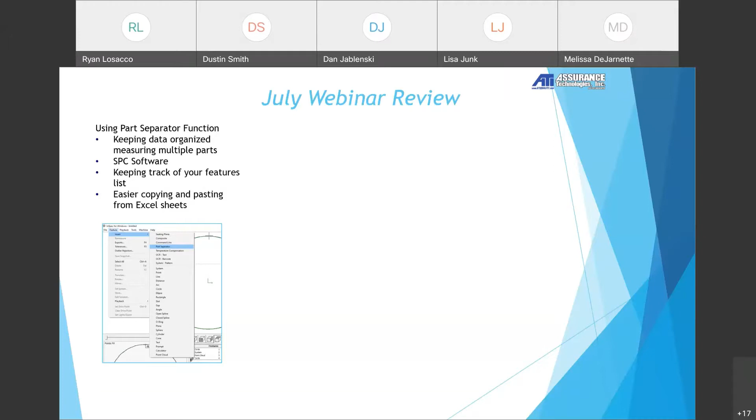We also talked about flatness, and I will be the first one to say that I am not the smartest person in the room, and I do not know everything. And I always like to say that when I start any training seminar, class, or anything like that. And I'm so thankful for you guys joining. And when I say something that actually isn't true or not the right interpretation of a standard, you guys send me an email and say, hey, this is actually how I interpret it. So I know that gentleman is on today, so I want to say thank you in front of everybody.

So when I was talking about flatness, when we have this symbol, you guys can see my cursor here, it had this square next to the flatness, so we have two flatness readings. I was taught a long time ago in a blueprint class that that was meaning one thing when it actually meant something else. So it actually means the size of the controlled increment, not the number of increments. So I thought you took that surface divided by 10, put 10 planes on there. It is actually the size of each plane going on there. And I hope I am explaining that correctly.

So if you guys joined last month, wipe that out of your memory, and I can send you this part of the standard so you guys can read up on it as well. But I just wanted to say that in front of everybody that I'm not always correct, so do fact check me sometimes. And if I interpret a blueprint wrong or a standard wrong, I would love to learn from you guys. And this gentleman said that he's been teaching metrology and blueprints for over 40 years, and he learns something new every time. And that's why I love teaching, is because I learn something new every time. So thank you for correcting my last webinar there.

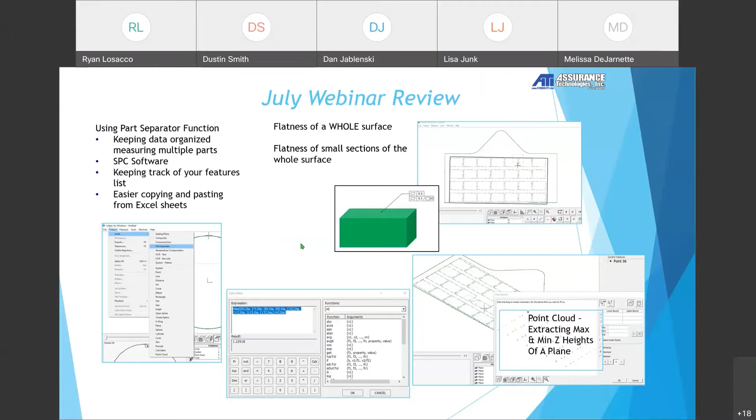And we started talking about the calculator function and all the different things that are in the calculator function, and we'll hit that a little bit today. But we talked about finding, if we have 10 diameters, finding the max, min, and average of all 10 diameters using the calculator function. Calculator function is super powerful. And there's times that you're trying to figure out how to calculate something that InSpec maybe doesn't have the option for in its normal presets. You can always look to the calculator function. And I would actually love to hear from you guys in your feedback surveys, or send me an email of ways that you're using the calculator function, so I can use that for a future webinar to teach everybody else.

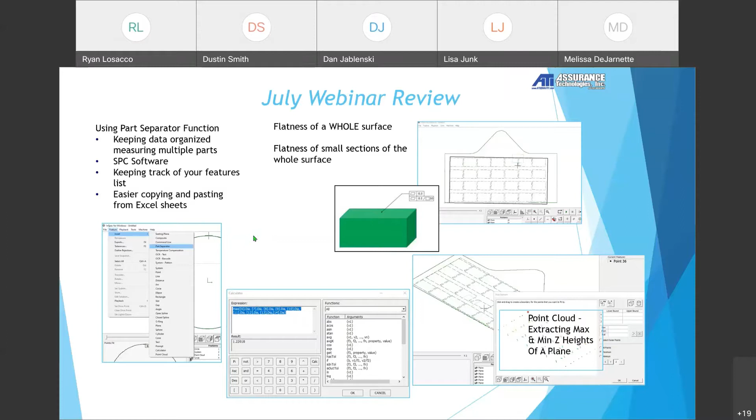So first thing I want to talk today about is the rectangle tool. Kind of funny when Dan and I and other trainers go through features, we'll bring up the rectangle tool or we'll bring up the ellipse tool, and we get a lot of either blank stares or people just tell us we never measure rectangles. But it's funny that I've had 2 projects in a row that are using true positions of the rectangle tool. So I figured, hey, why not spend a little time talking about the rectangle tool.

So when I measure a rectangle, when I measure a slot, when I measure distances, gaps, angles, anything, I measure the features first. You are able to come and just click rectangle and go measure your 4 edges of the rectangle, but then those lines are tied to the rectangle and you can't use them for other distances. If you measure 2 lines as a distance, you are not able to use those lines for anything else except the distance. Same thing with angles and even slots. When I measure a slot, I'll do the 2 arcs and I'll do the 2 lines, and then I'll click slot and I will click all those features to create that feature.

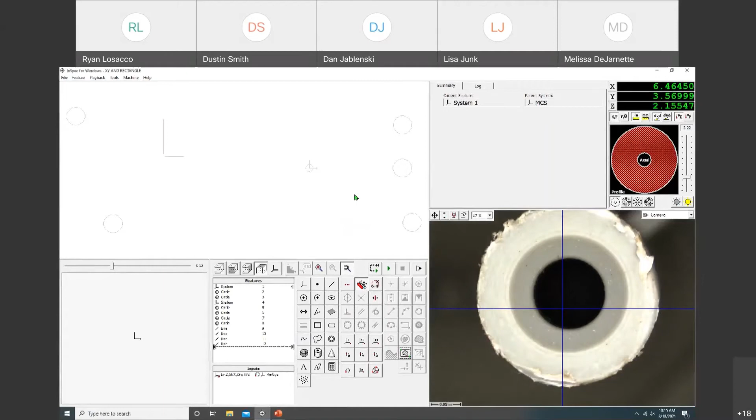So I did a little prep work this morning, doing a couple programs. So it's kind of hard to see here because I disabled all the features, but I just wanted to be able to find my way around this part quickly. So we'll measure it live. I'm going to go ahead and turn on my surface light. And we got this plastic part here, a couple different posts going on. So with the rectangle tool, I'm going to come over here. We got this feature that the blueprint is calling out the true position of the center of this rectangle that we have going on here.

So the very first thing that I am going to do is I'm going to set up my datum structure, which on my blueprint, it says that this post right here, the center of this post, is my origin of X and Y. So I'm going to go ahead and click circle. Let me go ahead and delete that. I'll run the program. There we go. So I'll click circle. It's disabled.

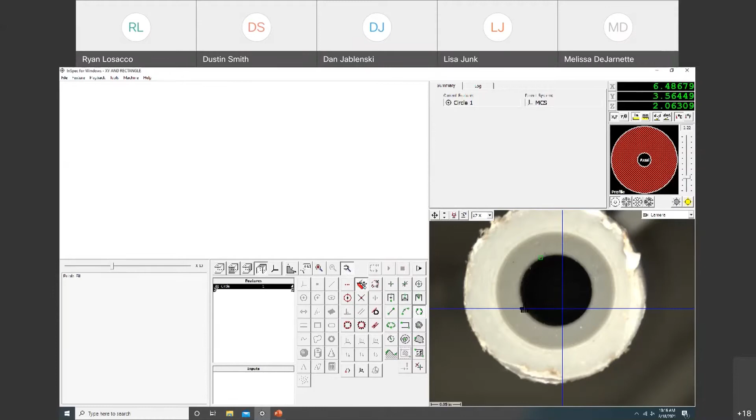I'm going to go ahead and delete all that. There we go. My vision tools were disabled for some reason. I think it was trying to have me run some part of the program. Anyways, so I'm going to measure this with an F-scan circle. As I've talked about in previous webinars, I'm going to have the red arrows going from the dark to light because there's less gray value going on, and then it's able to scan that circle there.

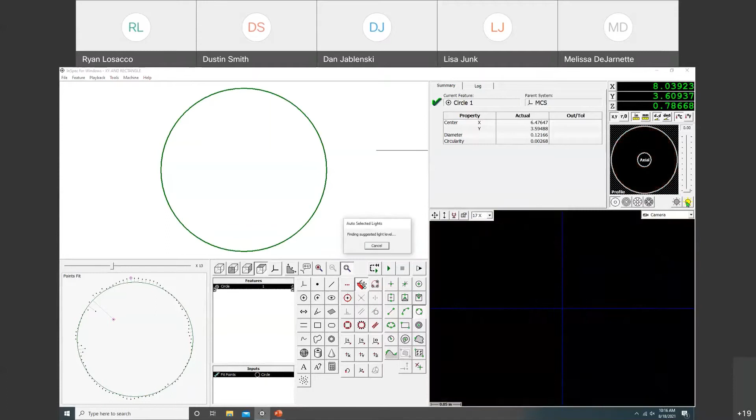And then now I'm going to come over, I got to find my datum B, which is right here. There's this circle that we're going to use to skew to. I'm going to go ahead and turn on profile light since it's a through hole. And while I see this fixturing, so this diameter right here is actually one of the threaded holes on my fixturing plate. Few people have requested more topics on fixturing.

One little tip and trick with fixturing here is that if you want to avoid having any of the acrylic scratches or glass scratches or dealing with the threaded holes in your plate, maybe lift the part up a little bit so this gets blurry. That'd be a smart thing to do if you're trying to write a fully automated program that's not going to scan any wrong lines. So here I'm going to use just best edge points real quick to measure this diameter.

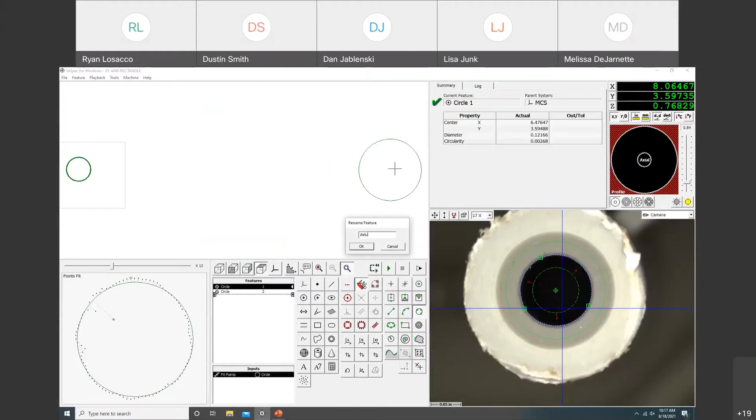So I'm going to call this datum A, which datum A is usually a plane, but we'll call that datum A. We're going to call this datum B. So now I'm going to come down. I'm going to set my origin of X, Y, and Z. I should get a focus point for the system, but for time's sake, I say that a lot. I'm just going to set my origin of X, Y, and Z to that. And then I'm going to skew to those two circles.

When I skew to those two circles, it's doing a line straight through the center of both circles. If you are more of a visual person and you want to skew to that actual line, you could click line and you could click your two circles here and you could skew to that line. But I like clicking less and getting results faster. So I'm just going to skew to those two circles there. So now I got my origin over here to this diameter, and I'm skewing between these two diameters.

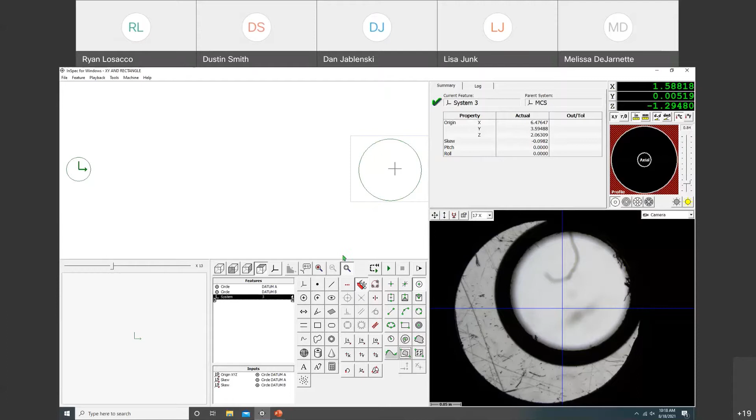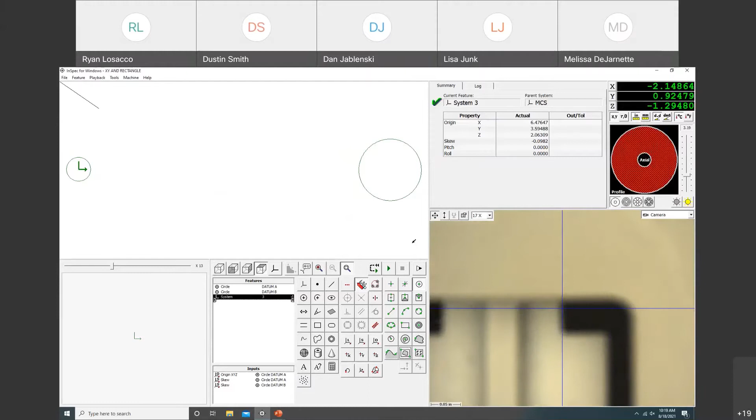So now let's go to that rectangle tool. Here's a little trick I like to do: I like to turn on my axial light because on the part, it's a smaller circle of light, so it's easier to find where you actually are on your camera. So it's a little way to move around the part without knowing where the feature's at. So on these edges over here, I'm going to come measure this line. I'm going to bring the Z up actually to get it in focus.

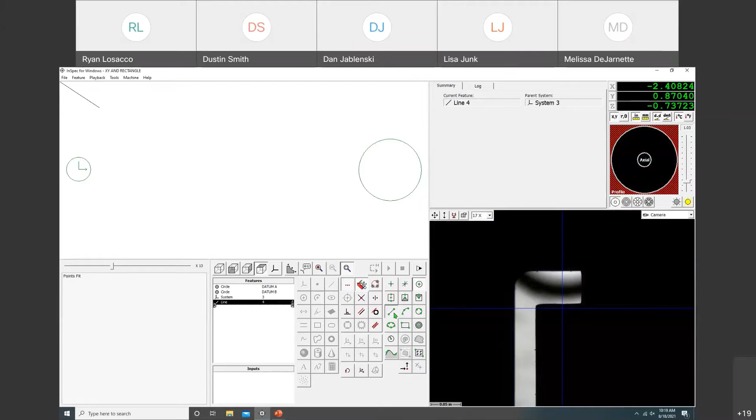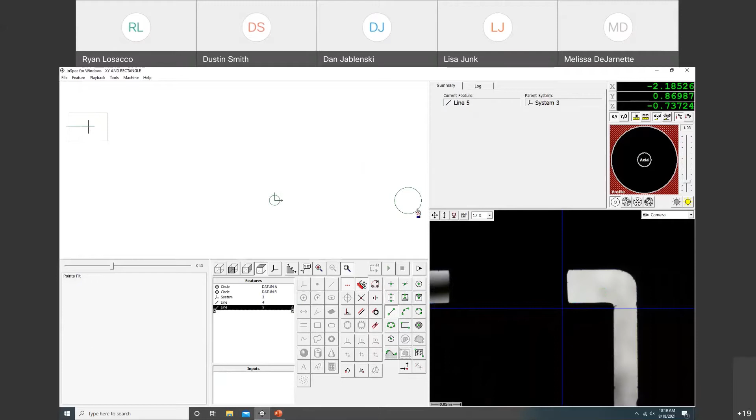And I'm going to select line. I'm going to do more inputs so I can get both edges of the line. I'm going to use my F-scan line tool. Measure one edge here. I'm going to flip that arrow because there's a lot of noise, gray value going on over there. And then since I have more inputs selected, now I got my line going on over here in the top left corner of my schematic window. I'm going to click a new line, come down this edge. Get as long of a line on that edge as possible.

I'm going to switch over to surface light so I could see the end of this part here. I'm going to do line again, more inputs. I'm going to get the best. So you can see here in my points view, and I'll open up a large view here. We can see that our points, they're kind of scanning on that line. We got that best fit line going through the center. It looks pretty good. If I had this opened up a little bit, you can see how much more dramatic the edges get, or the points landing.

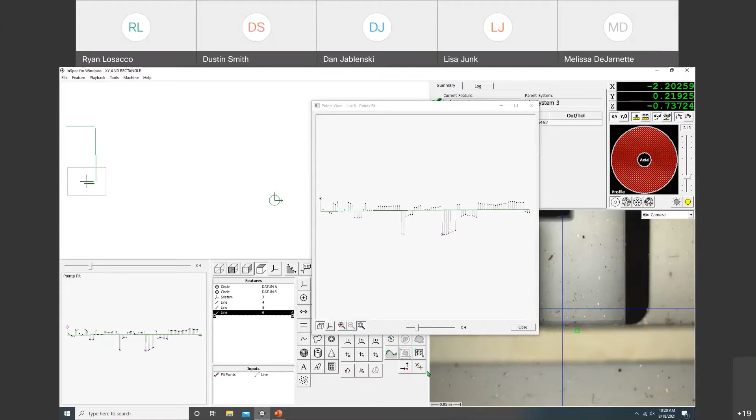And you can see down here in my camera window, those green dots are where the points are actually scanning on there. So I actually want to flip that edge, get these windows out of the way, flip that edge and get a nice line on that surface there. And normally, if I was programming this for production, I would spend a lot more time on my lighting to figure out the best lighting.

While we're here, let's go ahead and switch some surface lights and octants to see if we get any better lighting going on. Switch to axial light. That's a lot worse. Let's switch to front.

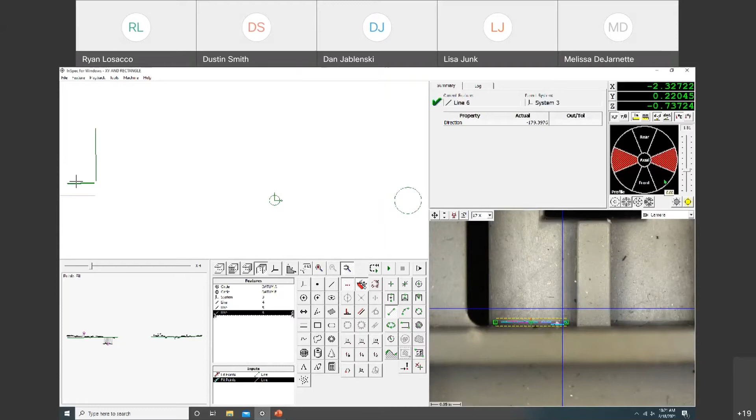Now we're casting a shadow over that wall. I don't like that at all. I'm actually going to click on the left side octant, hold down Control, select the right side octant. So those are the ones only with polka dots. Doing from side to side, we actually get a little bit more shadow cast in that groove that's going on. I'm going to bring that over to avoid whatever that is going on there.

All right, so I'm going to switch back to profile light, do a new line, more inputs. And then now we have our four edges of our rectangle. So now I can come down here and select the rectangle tool.

I see a lot of first-time users, since they both kind of look like a plane, get the rectangle tool and the plane tool confused, but always remember you could hover over an icon and it'll show what that tool is. And also in our basic training manual, there's a page for every single icon down there that you guys can have at your desk in case you forget.

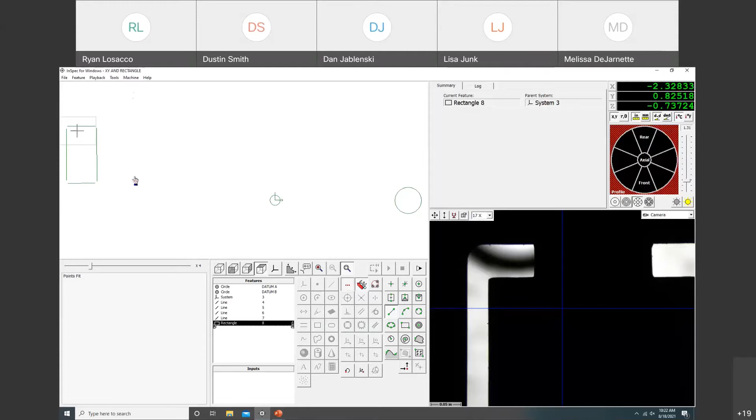So I'm going to now select all my four edges of my rectangle, and it creates my rectangle there. What I use this for is if it's asking for a true position of this rectangle, I can click point, and now I can click my rectangle in my features list, or you can come over to the schematic window, and it creates a center point. So now I have my XY coordinates that I'd be able to get my true position from.

And things that we can tolerance with a rectangle: we can tolerance the center X and Y, we can tolerance the width and height of it, and we can tolerance the true position of it. So if we did 2.30 and then 0.54, it calculates our deviation from nominal. Let's just put it out of tolerance just to show you. Close, and then we have our true position out of tolerance there.

So another thing that you could do, if you don't want to use the rectangle tool, we could do a line. We can use the bisect construction tool: if I click both long edges of the rectangle, we get our center line. And then if I click line and I click the short edges of our rectangle, we get our other bisect line. And then we can do point intersection of those two bisects. So a little more work than just clicking the rectangle tool, but in case you need these center lines for anything as well, they're there for you to work with.

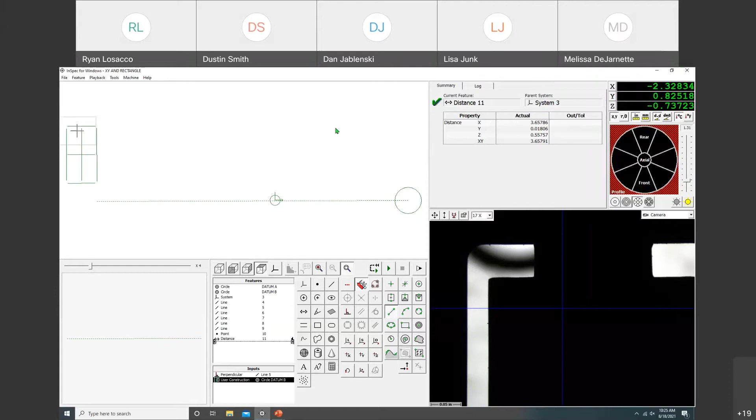That's the rectangle tool. If you guys have tabs or other rectangle features on your parts, where I've been seeing it in the projects coming into our lab here in Bartlett has been the tabs of off-roading vehicles and plastic parts that are being clipped on to the frame or other plastic parts. They need true positions of those rectangles, like in this blueprint here, it was asking for the distances from those.

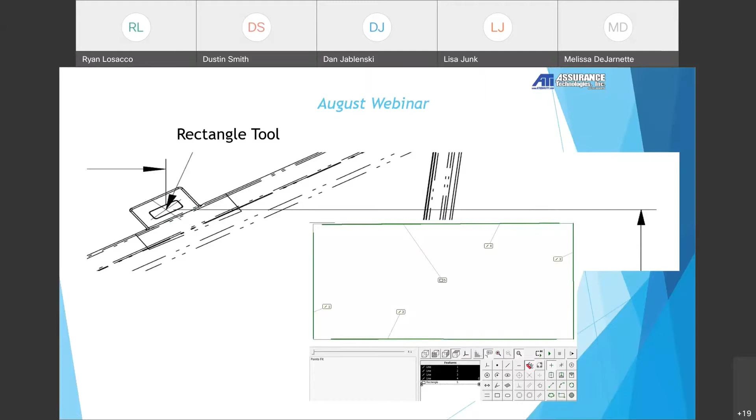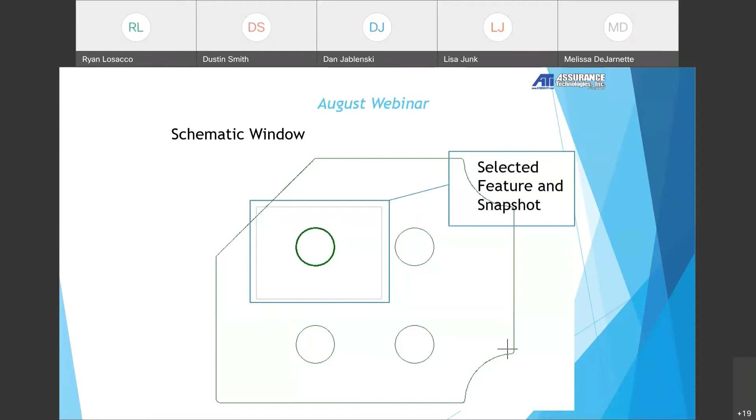Here's a little thing that I wanted to talk about: the schematic window and the different things that are in the schematic window. So if you are on your schematic window, and we'll go live here on InSpec in a second, but I want to show you this gray box is your camera window. And this can get confusing: if you're at the end of your program and you're clicking around in your features list, it's showing you snapshots and where that snapshot is. But this crosshair down here is the actual machine location.

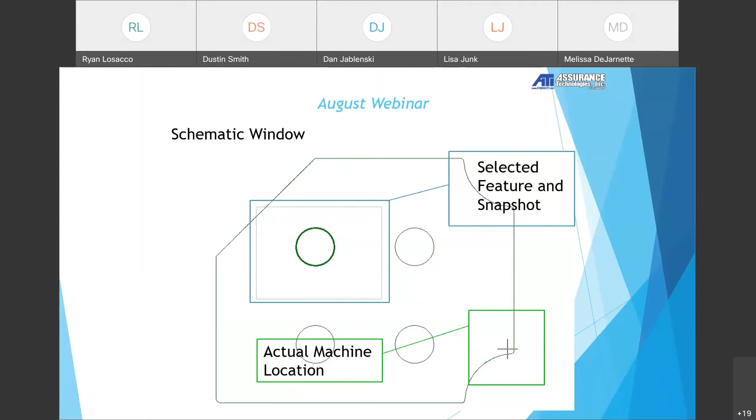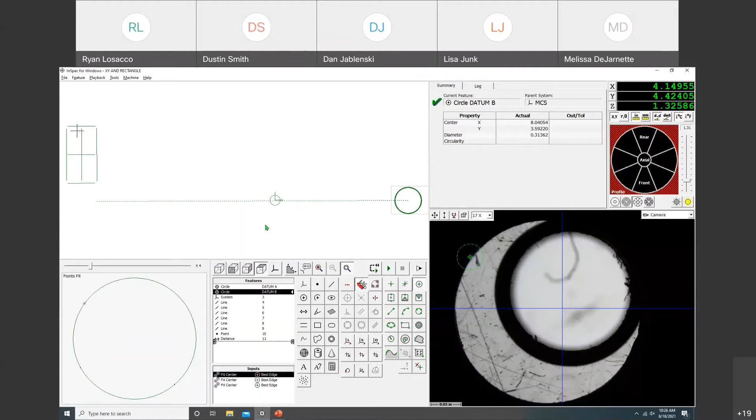So sometimes if you're moving the part around, if I go ahead and click on this circle that's datum B, you can see that my gray rectangle over here is the camera window, but that's showing what's in the camera window. My actual live location of the machine is over here on the rectangle. So this could get confusing sometimes, that if I know I want to go to datum A over here, and I'm here on this circle and I start moving to the left, I'm actually way over to the left of the part, and I have to come over.

And now when I'm moving the camera live, the crosshair and the gray box are in the same location. So I've seen a couple people get mixed up with this when they're programming or in training, so I just wanted to mention it real quick. If this kind of annoys you or you're trying to show somebody something, it's just a little tip there.

All right, calculator functions. When we are measuring circles, most of the time when you're reporting true positions, you might either give a positive X and Y or absolute X and Y on your report, or you might report the negative direction. So wherever this comes up, if it's true position and you're reporting, or if it's going into an SPC software, and when we measure a diameter, if you want to report an absolute number, but Micro-Vu is reporting it as a negative number because of the location of it in relation to your datum, we'll be able to pull that absolute number out of there.

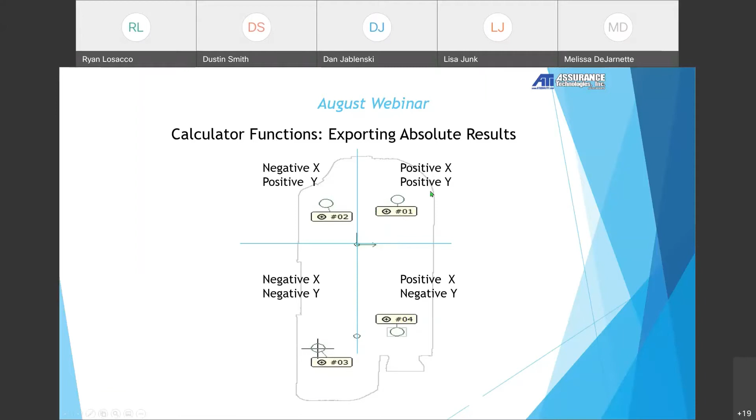So here we can see that our datum is in the center of the part, same part that we're using live, and our diameter number 1 is in the positive X and Y coordinate of the part. To the left of that is number 2, where it goes negative X and positive Y. Down in the lower left-hand corner, you have negative X and negative Y. And then lastly, number 4, you have positive X and negative Y. So it's kind of nice because it's alphabetical order in the calculator functions.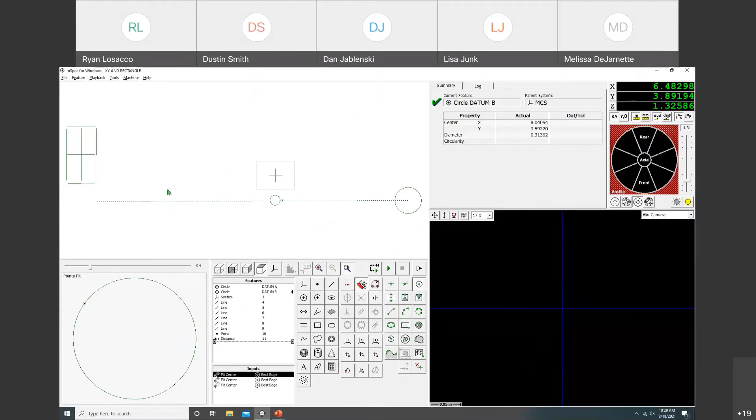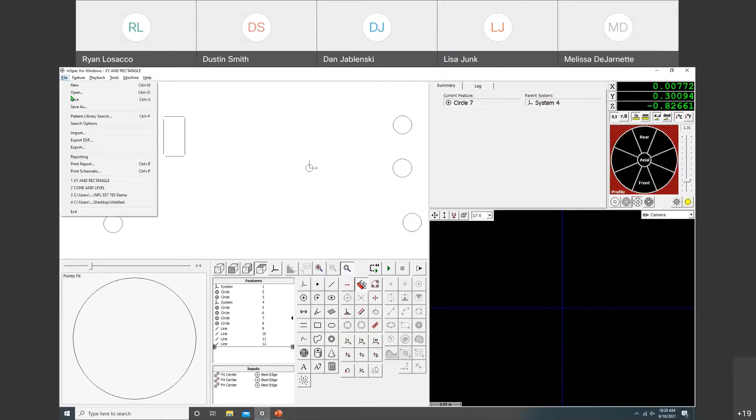So let's see if I go back to this guy. I'm going to enable this whole program so we can measure it. In case you didn't see this in the previous webinars, you can highlight features, right click, and go to this playback option, and you can disable or enable it. I think I showed last month or the month before using a spline to outline the whole part and then disabling the spline just so I had some reference of where my part is on the stage and other features. I'm going to go ahead and enable all this. File, save. Let's go ahead and run this program.

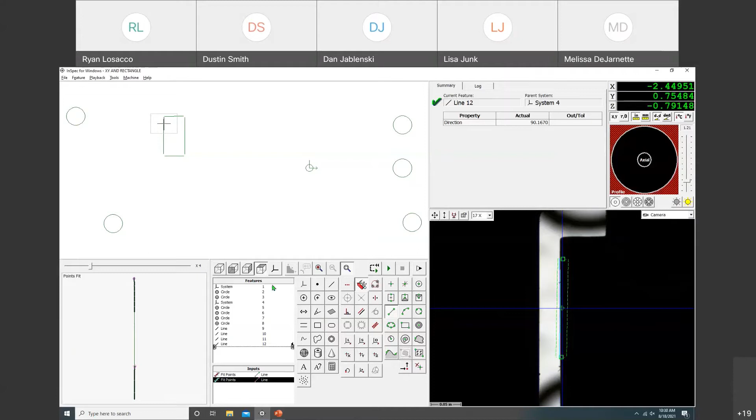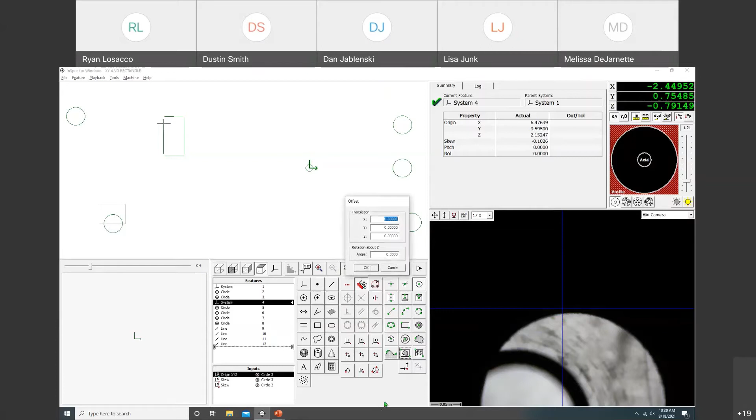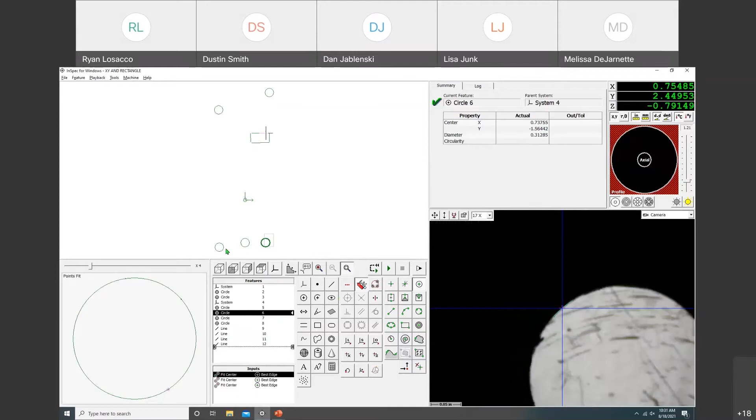We could come down to the red construction icons, and we see this offset here. We can open up offset and we can rotate about Z. In this case, I want to rotate around Z 90. And now you can see that my origin turned 90 degrees. So now when I hit the PCS view right here, my diameter is positive, positive in the upper right corner. Now I have my negative X, positive Y on this diameter, and so forth. So I have these two locations.

I want to come over here to circle 6. I can click the calculator function. I can double click absolute. I will select the circle that I want to get an absolute instead of a negative number. And it comes up with anything that a diameter is measuring, everything from XY location to profile to position, concentricity, circularity.

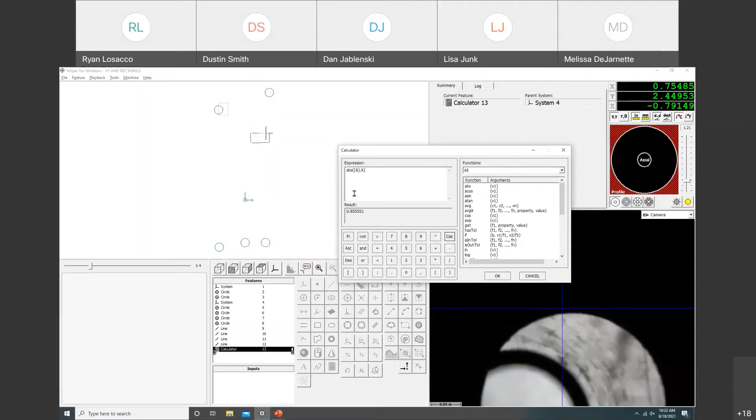So I'm going to click X. I'm going to say I want my actual, not the deviation, but if there's anything that you're looking for to pull out of a feature, we could ask for the out of tolerance amount, the lower, upper, deviation from nominal, and so on. So I'm going to click actual, calculate, and now I got my positive result that you can right click, tolerance, or export, whatever it is.

Basic dimensions, so I'll leave that, and then I'll export it. And now I'm exporting an absolute number instead of exporting that negative number. So this is useful for, other than true position or anything else, any reporting, any software you're bringing into, so you don't have to be rotating your system to get all these positive in any certain way.

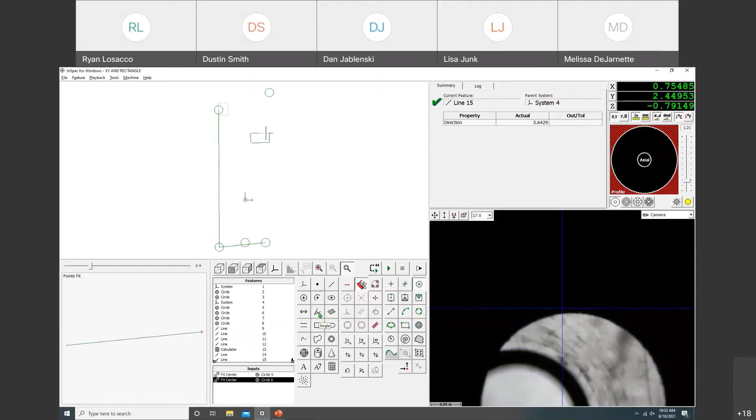You can do that. Another thing with negative and positive numbers that I find very useful: I'm going to create two lines off of this guy and this guy. I'll do another line here and here so I can get an angle. So I'm going to use the angle tool, select my two lines, and now it comes up with these different angle options that we have.

Down here, depending where your angle is in relation to your system or your part, your skew, you can select positive or negative numbers. Where I use this the most is that an angle is just an absolute number when you're putting it on your inspection sheet 90% of the time. But depending where the angle is on your part in relation to your system, you could get a negative number.

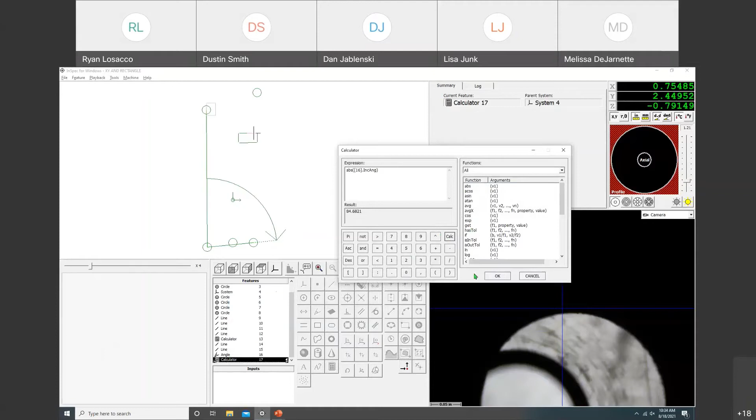So when I copy and paste it off of my Excel sheet, I always have to go into my Excel sheet and say, make all these cells absolute, when in my programming, if this was negative, I can just use the calculator function, absolute, click my angle. I want my actual, and then we got our absolute angle number there. And then you can go tolerance it, export it.

Now with SPC software, I'm not completely sure, I'm a little unfamiliar with it, how it'll pull in the calculator function if you're labeling it angle. That's something we can help you with if it kind of messes stuff up going into your SPC software. If it's ProLink, we can help get them involved to help you out with whatever works the best for your situation.

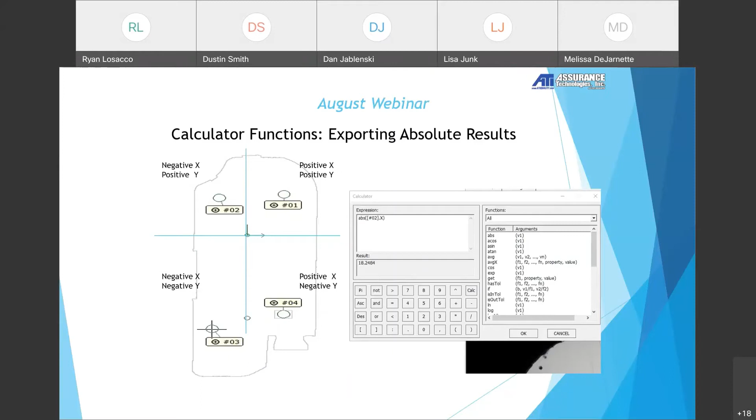I say this a million times, but these webinars are to show you the tools in your toolbox. If you never have to use the 10 millimeter for a year, but then all of a sudden you need to use the 10 millimeter socket, you know where it's at and how to use it. But here's an example of the angle that I was talking about.

Awesome. So the next thing that I want to talk about is offsetting features and construction features. So in this instance here, we have a blueprint that's actually wondering, on this cone that we have going on here on my sample part, at a certain height, what is the diameter on that cone? So it was halfway down the cone and it wants to know what's the diameter at that height. Using construction icons and the offset features, we're able to do an intersection of a plane and that cone to be able to get our diameter at that intersection.

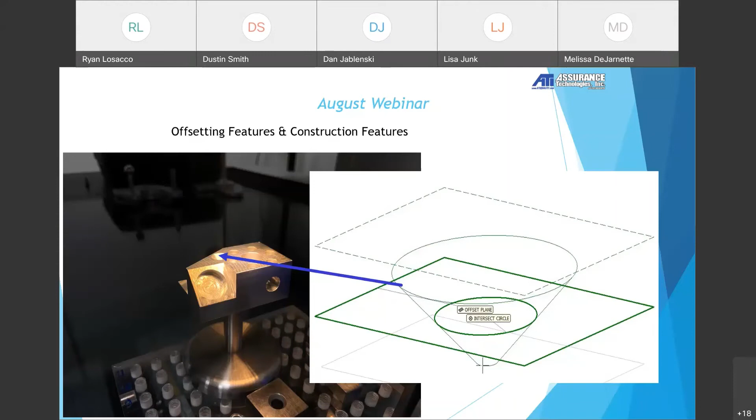I'll come over to inspect here. Let's go file new.

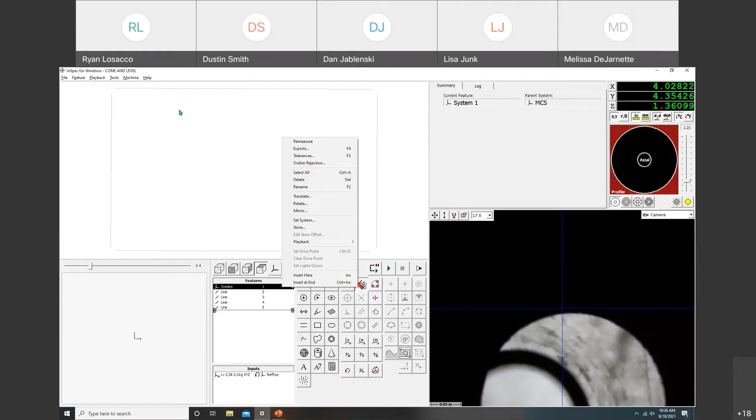Put that little machine block on the stage here. Again, I went and measured the outside edges of the block so I would be able to find it easily. Here on the webinar, you guys can do that to give yourself the outside features to work yourself around on the part, because now I can, in my schematic window, click move here where I want to go.

So first thing we're going to talk about, I know that my cone is somewhere in this area here. And boom, there it is. Because I had my disabled lines, I'm able to click around in my schematic window a lot faster. I'm going to go ahead and get this surface in focus.

I have not had luck with focus points in the past. I think it's because WebEx messes with the video card. So let's see if this works. Hey, look, it's working today. We're going to run with it while we can.

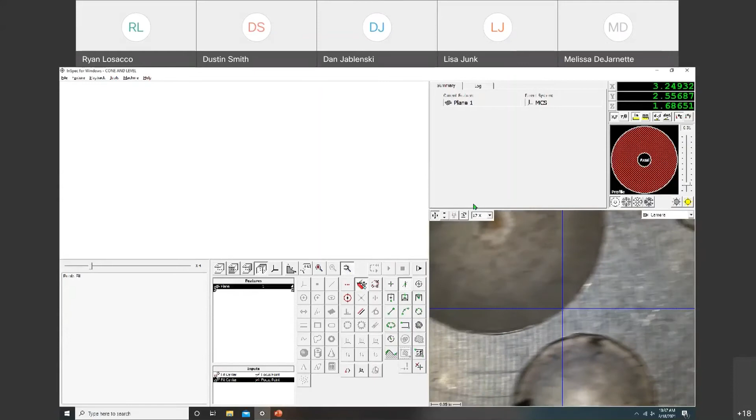So I'm going to go ahead and do a plane on the top surface of my cone and keep it local. Even if the top surface of this part is datum A and you want to take 1,000,000 points around datum A, for this case, I would still do that, but then go make another plane that we can offset down, because we don't want to offset datum A and mess up the rest of our system.

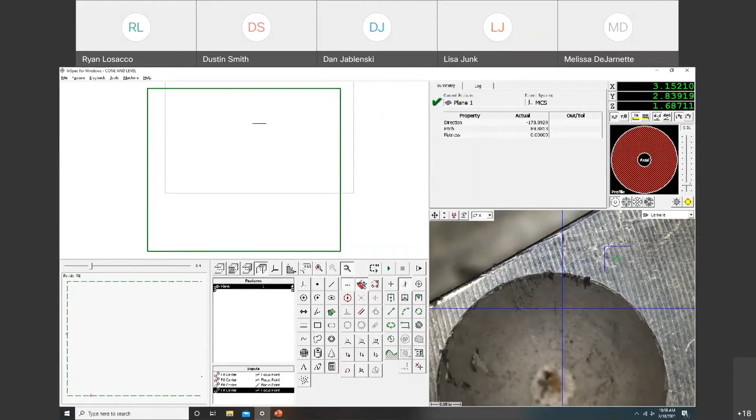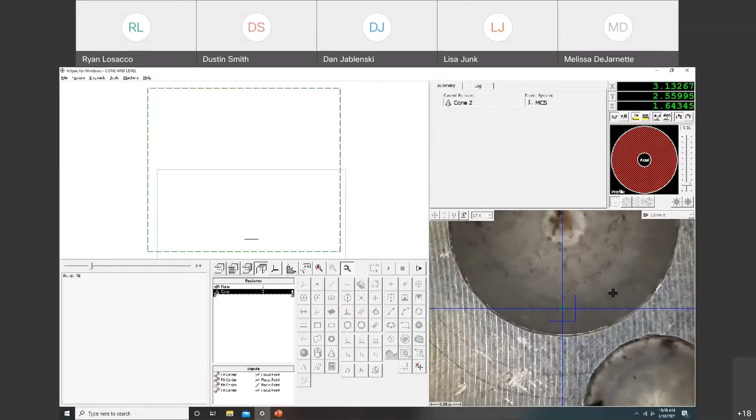So now I'm going to go ahead and measure my cone. And yes, I should be at a higher magnification for accuracy in Z. But in this case, I want you guys to see the whole feature while I'm going around. So now I'm going to click cone. I'm going to click more inputs. And I'm just going to start taking focus points around this cone. And it's able to use that focus point and Z measurements to know the different levels of this cone. I'm probably going to do more points than I need.

I apologize about background noise. You guys can hear that. Shipping is extremely busy here at ATI.

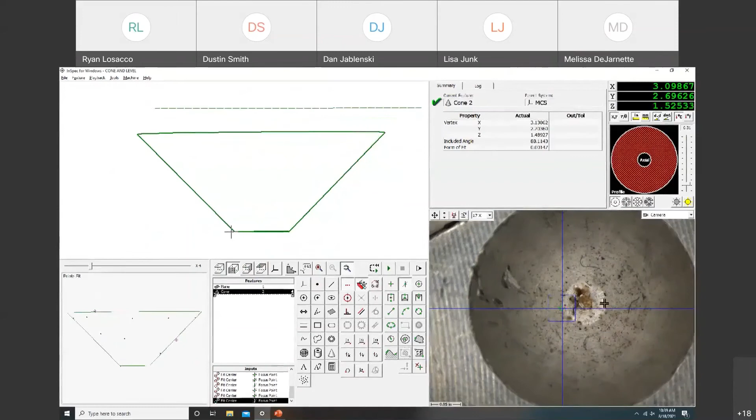So here I'm going to hit the isometric view. You can start seeing my cone. I'm actually going to hit the front view because I want to make sure that the top of my cone is almost as parallel as possible to the plane to make sure that I'm getting a real good reading and my focus points are creating that 3D cone the best it can.

And if you hold down the scroll wheel on your mouse, you're able to move it around kind of like CAD software, if you've ever used that before. So now, make sure that I'm in inches. Yep.

Now I'm going to click plane. I'm going to copy plane 1. So you can either click it in the schematic window or you can click it in your features list. So now I'm keeping my original plane so that doesn't get changed. And then I'm going to copy the plane and I'm going to offset that copied plane. So I'm going to come down to my construction icons down here, find the offset icon.

And I'm going to say I want to offset that negative, let's try 0.1. I don't have my blueprint on me, so if my memory serves me correct. So I just offset that plane down 0.1 of an inch to get it to the location that we want to get that diameter there.

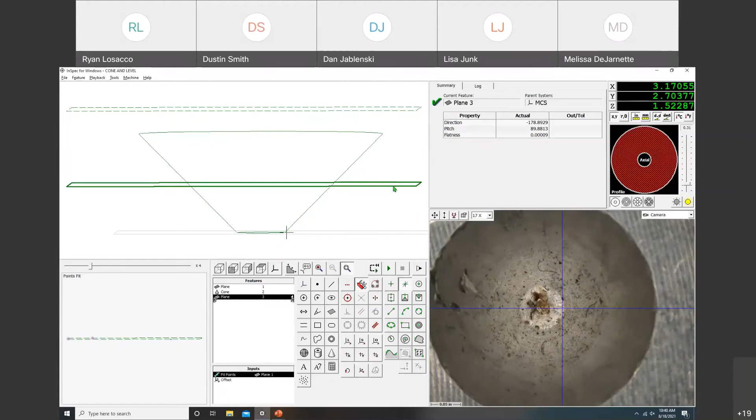So I'll run through that one more time. So I'm going to click plane. I'm going to click plane 1, so it copies plane 1. I'm going to come down to offset. And I want to bring that plane down negative 0.1. And your blueprint will tell you what height it wants the diameter at and all that.

So here we go, isometric view. We can see our two planes, our cone. So now I can click circle because we want this diameter that is intersecting this cone and this plane here. So I'm going to click circle. Now I'm going to use the intersect tool. You can use the intersect tool for intersection of two lines, intersection of a line and a circle. In this case, we're going to intersect the plane and the cone here.

So now I click the intersect construction icon. I'm going to click my plane and I'm going to click my cone, and it gives us that diameter at that height that we needed in the cone there.

Other ways you could do this: if you had a touch probe, you'd be able to set your origin of Z to the top plane, and then you would be able to bring your touch probe down negative, whatever it needs to, and take that plane there. But if you don't have a touch probe, this is one way that you can get that diameter at a certain height.

Try this out on other features, knowing that you can offset planes, offset circles, offset lines, anything that's maybe on your blueprint that you can't physically measure, because when we're looking at this cone here in the camera window, even if I said my origin of Z was this top plane, and then I wanted to do a focus point at a certain height, I can right click in the camera window and say move to absolute

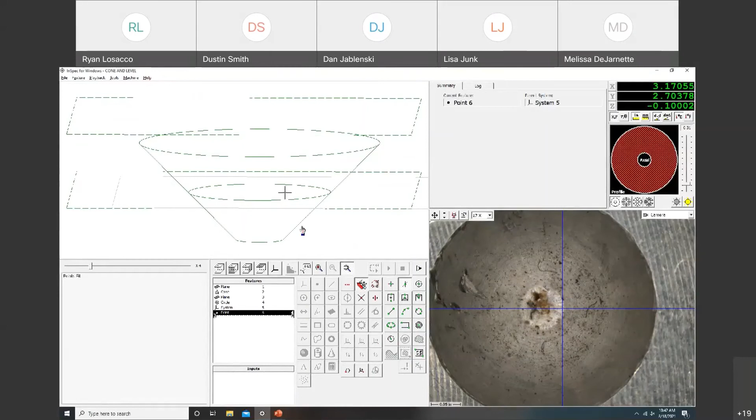-0.1, and it brings my camera up to that height, but still looking at this cone, I don't necessarily know where to place my focus points there. But if you're physically touching it with a touch probe, that would work.

So other things with construction features is leveling. I want to show you when to level and why it's important to level. You can see here we have this angled surface. When I take this diameter without leveling, it makes the plane, I never know how to say this, parallel with the camera or perpendicular to the camera, but basically it's flat. InSpec is always thinking more in 2D. The software is thinking 2D, even though we can do 3D measurements.

So if we took a diameter at different Z heights, like we will on this diameter over here, it'll either average the Z heights or it'll place it where we have our origin of Z, something going on there. So we can see that this diameter that's not on the plane, this dashed line here, that's not leveled.

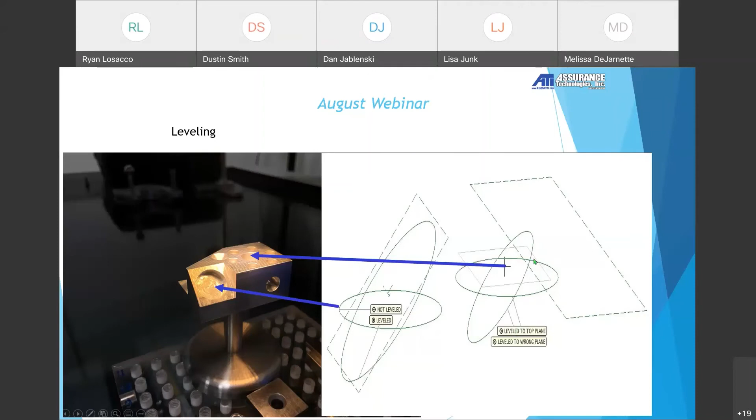But when I leveled the plane and took the diameter, it took the Z measurements into account. So if I was measuring this part, most of my features are on the top surface. So I'll put it on a fixture in some sort of way that those are... this plane, so that's looking at the camera when we can level. And also, you can see over here, I'm going to show you an example to keep track of your levels, because the one that is angled, I was still in my system that had it leveled to the left plane, not the top plane here. So it was actually placing those points leveled with that plane.

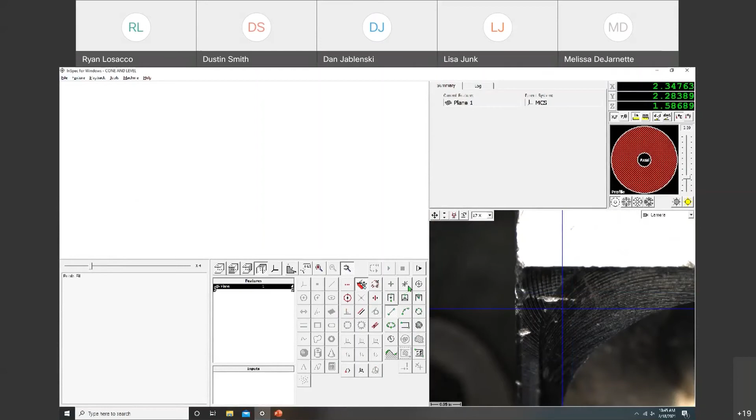Let's go ahead and do that live here. Hopefully my focus points continue to work here for you guys. So I know that my plane is somewhere over here in the lower left-hand corner. Move my surface lights up a little bit. So the first thing that I'm going to do is I'm going to measure a plane, use focus points.

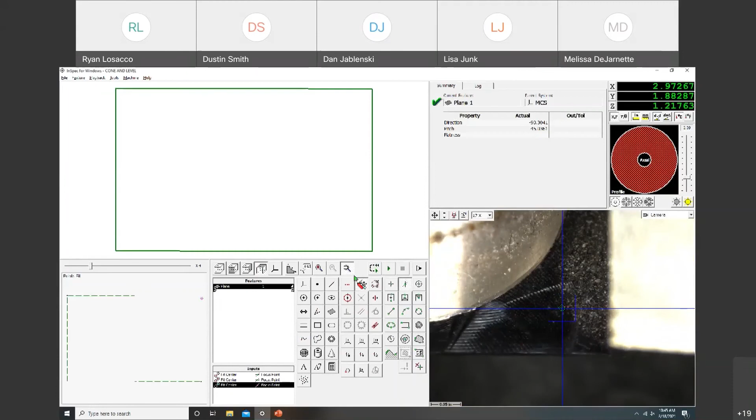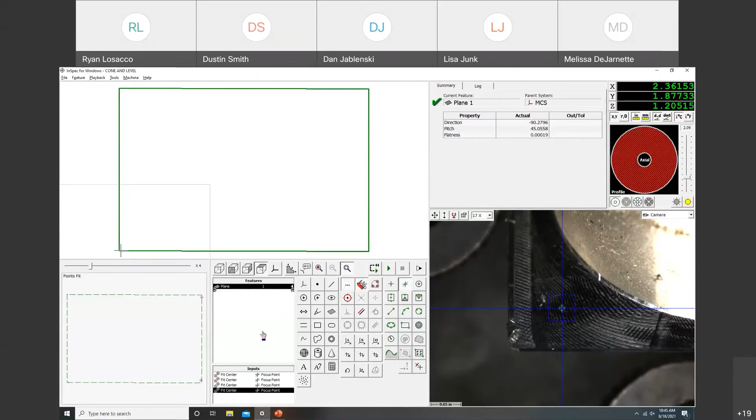And these kind of topics of leveling, setting origins, and skews, if you've been through our formal training or if we've come and done on-site application training, we talk about the importance of setting systems and what to set systems to. Dan's going to be teaching the datums and systems session at our training seminar in October. We're going to talk a lot about complicated systems and how to make your systems the most solid they can be to get all your different measurements. And I'm sure if you've been programming for a long time, you've had probably 5 to 10 systems in one program, especially if you've seen a blueprint that has double letter datums. You need to do a lot of that.

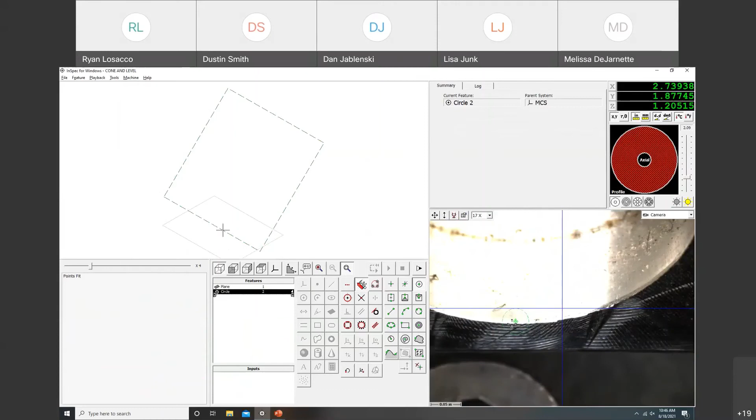So now if we look at our isometric view, we can see that we got our angled plane right here. So if I don't level, if I don't set an origin or anything, and I come over and I take this diameter, I'm going to place a point there. I'm going to bring my Z up to get this edge in focus. I'm going to take a point there, bring my Z up, take a point there if it'll read it. And since I didn't level, you can see that it is going parallel with the camera. And that's not the diameter we want.

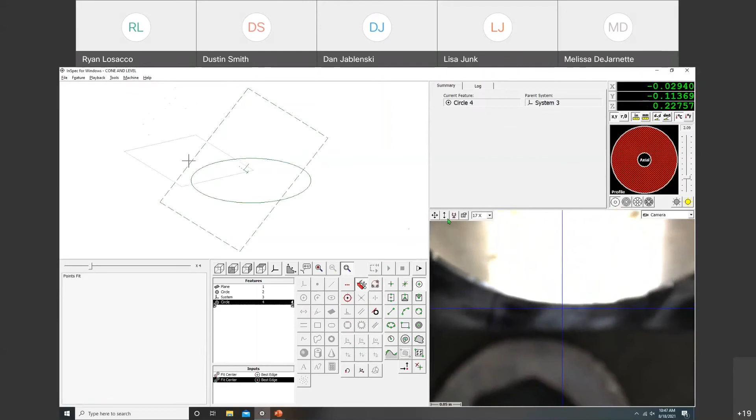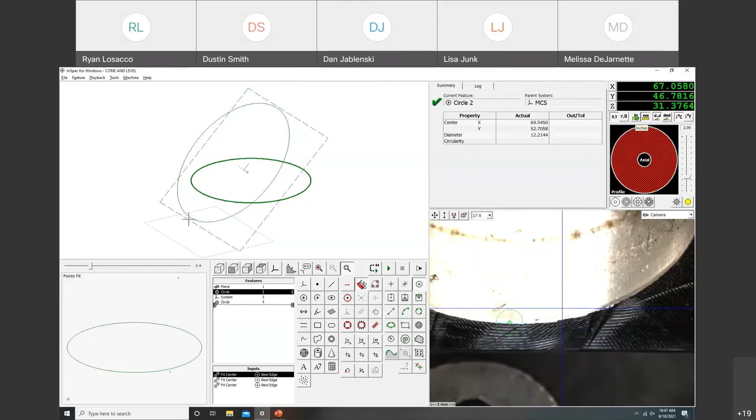So if I set my level to this plane, just so the schematic window looks good, I'm going to set my origin X, Y, and Z there. Now when we come take the diameter, you can even see that the scanning tools are leveled with my system. Now we have the circle on the surface that we actually want. And if we look at the difference between the two diameters, one not leveled is 0.48, 12 millimeters for those that are in metric. And then our level diameter is 0.567. Huge difference. And that is either way in tolerance or way out of tolerance.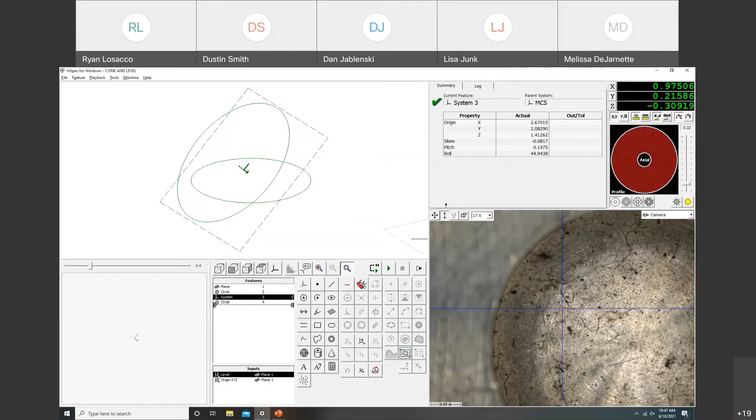Now, my latest system that I have is that leveled system. Now, if I move on to the rest of my part without thinking, and now I'm on my top surface, I come measure this diameter without setting a new system. Now that diameter, even though it's physically parallel with the camera, it is level to that plane. So in this case, what I like to do is if I have any angled surfaces, I'm going to set that system later. I would set the system that I want to the top plane so I can get out of that system.

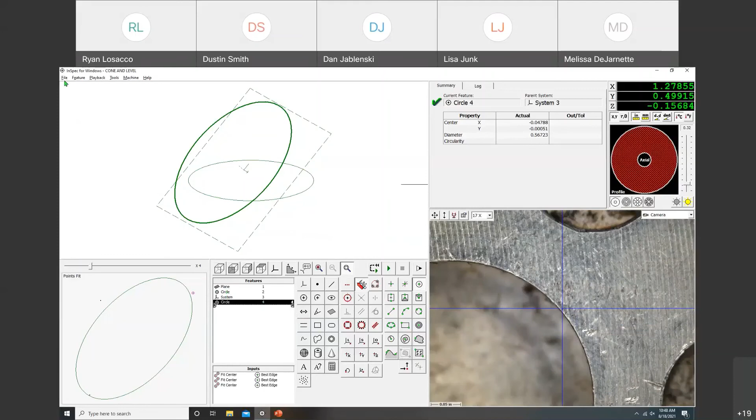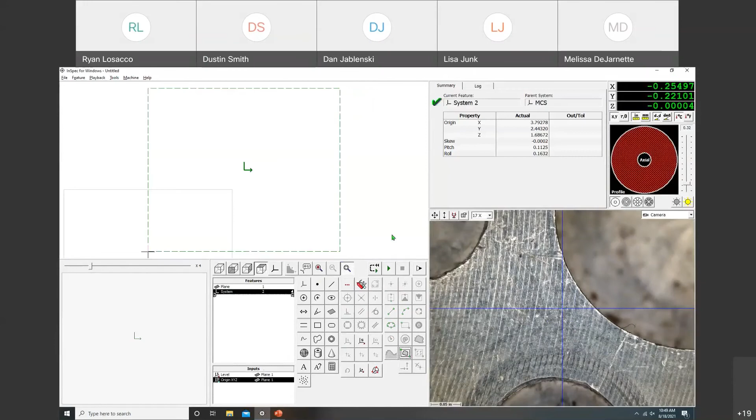So what I mean by that is my very first system is going to be thinking more 2D. What's more flat? The top plane is flat, parallel to the camera. So I'll set that system first before leveling to an odd, not parallel with the camera surface. So glad my focus points are working today. Now when I set my origin, I level to my plane, set my origin to that plane. When I take this diameter here, it's going to be on the correct plane. Super important for more 3D parts.

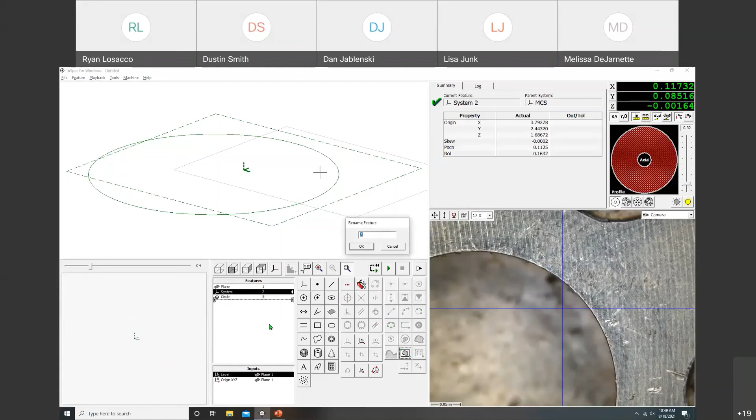Micro-Vus, like I said, are always thinking 2D, but we've talked about flip working planes before. We've talked about leveling now. This is where you really pull the 3D features and the 3D programming out of the Micro-Vu and make the Micro-Vu more powerful than just measuring flat parts or certain features. I saw Christina just asked a question. Yes, so when I'm programming, I like labeling my system so I can keep track. So this one, I might say top plane. And then when I come over, I would do this feature different.

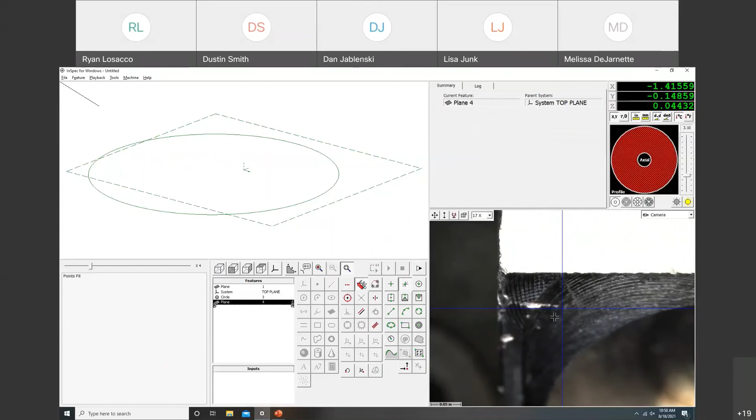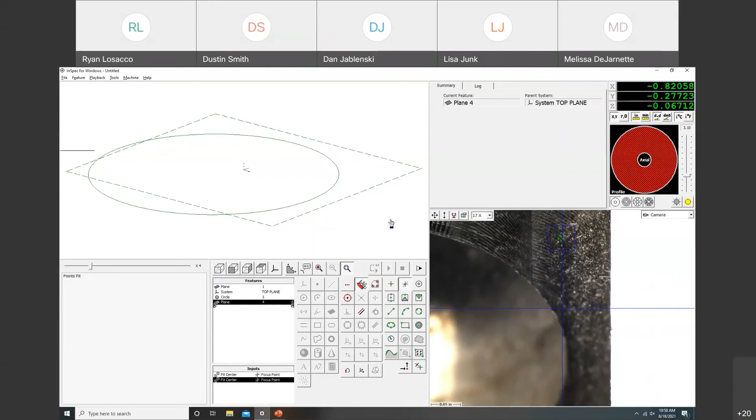But Christina asked, you need to set level and origin to the slanted plane as well. I actually want you guys to forget about me setting my origin X, Y, and Z to the plane. I've been doing that just to get it out of the way of the schematic window because it goes to the machine coordinate system when I just level to a plane. I would set my origin of X and Y to a diameter or an intersection point.

Skew to a line or two circles. And I wanted to show you here, you can see that now that I've kind of set a new level to this, my Z is going in this weird direction this way to the top left corner. And this is why you want to set your origin X and Y to a diameter, something like that, not the plane. But then if we come and measure this diameter,

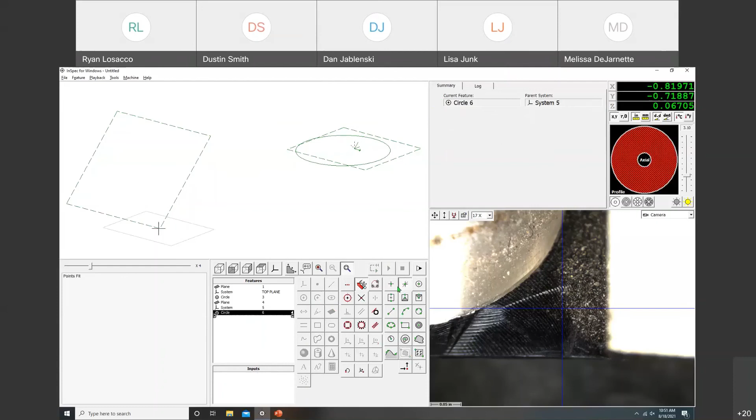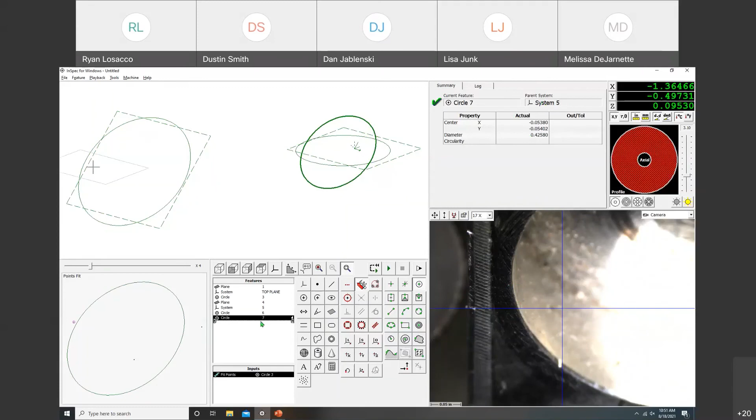we see that that diameter now is leveled to this plane. And if I copied this circle down to the new system, up here you can see in your parent system that it's looking at the latest system that is in my features list. So this is another topic that we're going to talk about in datums and systems at the training seminar: if we right click on that circle, I can set my system to a different system. So in this case, top plane, and it'll level to that one.

So if you do mess up where you measure this diameter in the wrong plane, you are able to right click on a feature, set system, and you can set it to whatever system you have going on in your features list, and it'll change it to whatever that level is.